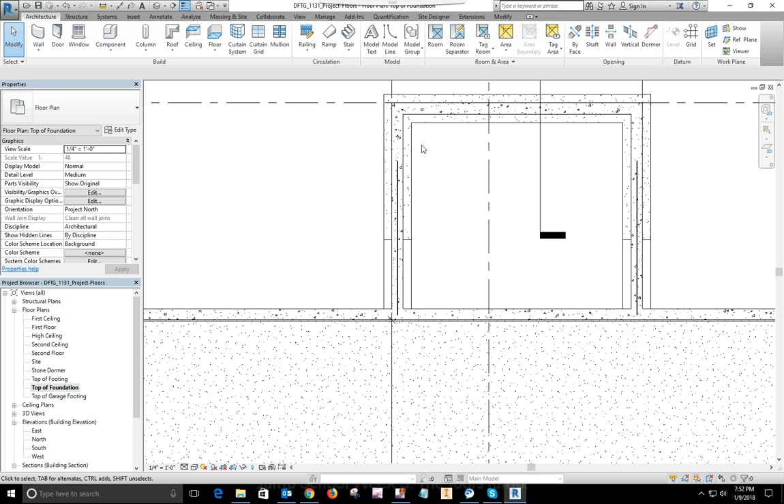Okay, now we're going to do the slabs over the terrace and the entryway, and probably have to do another video for the garage slab. I've already done in my project here the one back here of the terrace, and I'm doing these on the top of foundation level simply because everything for them is geared off of the foundation, the top of foundation.

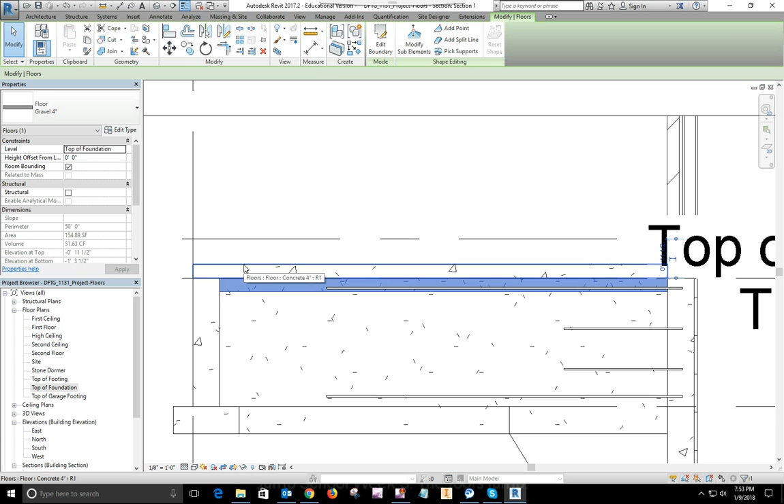So let me go to my section view here. I put in a gravel floor, just like we did with the basement, inside the perimeter of the walls, okay? And then my concrete floor slab, the 4-inch slab, sits on top of the exterior walls, and this is kind of in the way. But it ends right against the wall.

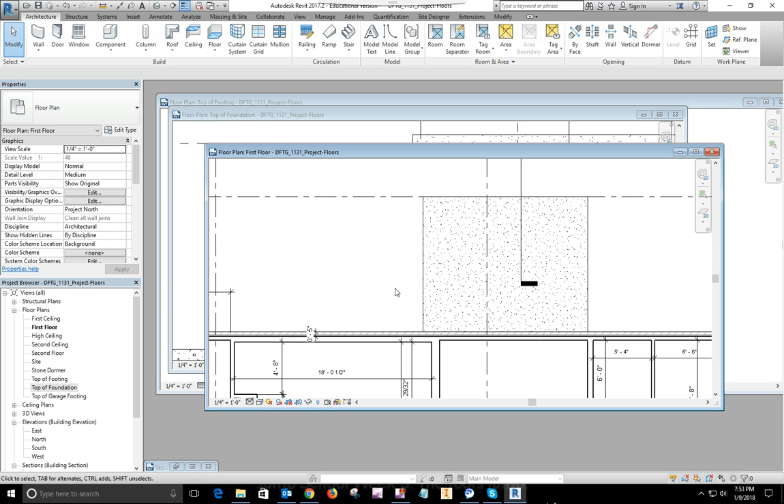So let me go back to the first floor plan, and you can see it there on my level one, my first floor plan level, and that's how it looks. And the plans that we're working from don't really tell us how to do this, because if you look at sheet number 2, the foundation plan, it just gives you a note: 4-inch poured concrete slab over gravel fill with number 4 bars. It doesn't give you anything. There's no section going through the building at either of those places to tell you that.

But if you look at the details for the grade beams, it shows the grade beam and the small foundation walls out in those areas. The top of those are level with the top of foundation wall for the basement. And then if you look at the front and rear elevation, the white mark below the stone is the concrete. So on the main house, that is the top of the foundation wall. And when you look at the entryway and the terrace at the rear, it looks to be about 4 inches higher in elevation than the foundation wall. So that's what I'm going by, okay? Since there's no other details for that.

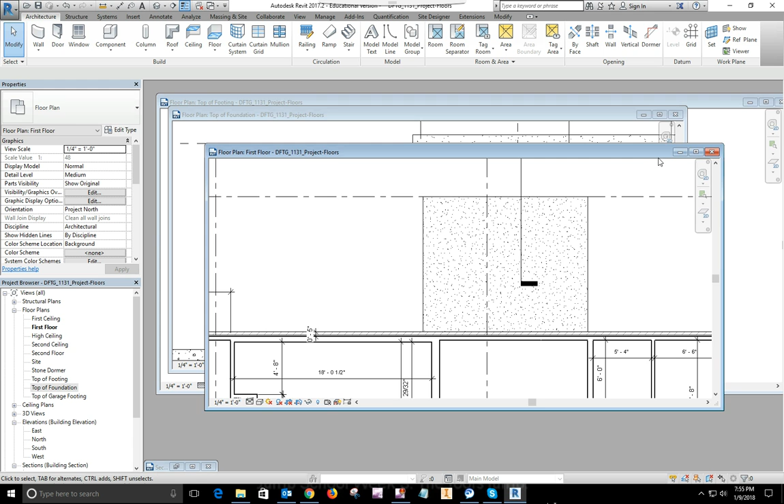And so here with this one, the gravel fill will just be inside of all of the areas. So that'll be an easy one to do here. And you can pick walls, you can pick lines, but we're going to go to the inside. Okay, and now we'll trim them back. Okay, and so that looks good there. An offset of 0, and that'll make the top of the gravel floor level with the top of foundation level. And no, we do not want to attach.

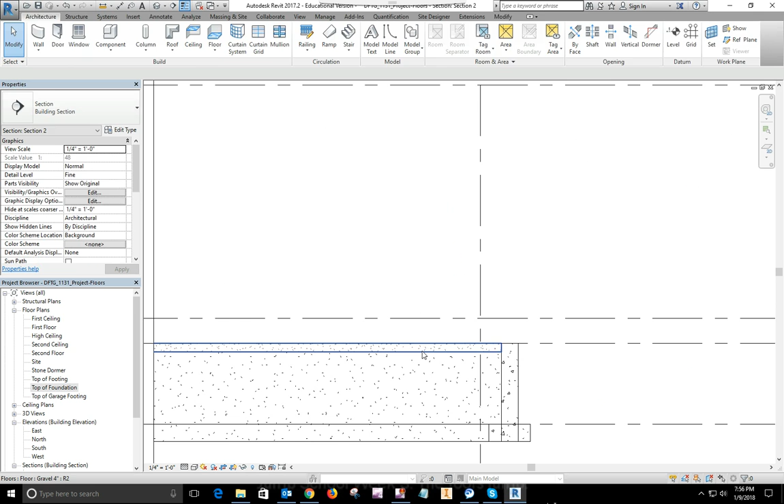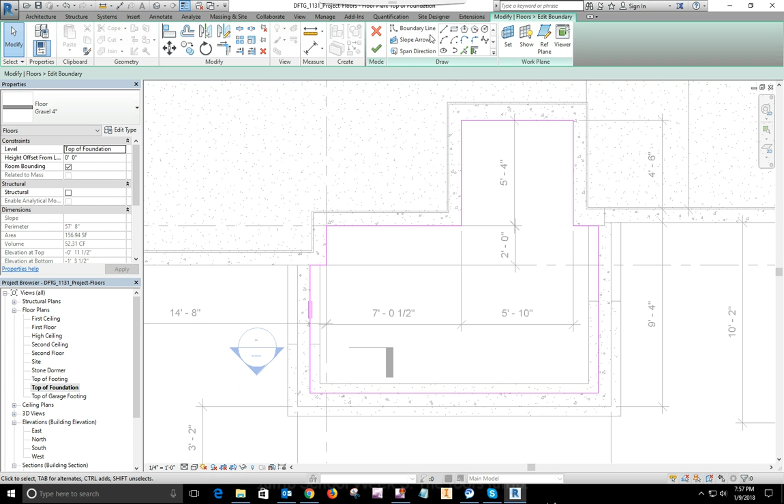That was kind of strange. I'm not sure where that came from, unless it was that corner there. So let's see, where'd my section marker go? Let me pull this back up and let's go look at that. Okay, that looks right. I don't see where it cut any volume out of any walls. Huh, that was strange.

Anyway, okay, and so now this one's a little confusing as far as the floor slab goes because it bears on top of these walls here. And so we can start with walls out here. And now we're going to have to draw lines in here and then dimension those.

And looking at the plans, it just tells us a 4-inch slab bearing in one of the notes. And then it's kind of hard to tell. So if it looks like the center of the wall, we'll go with a 4-inch bearing. On 2 of the walls there, it appears to be larger than half of the wall, so we'll go with 6-inch. And so now we'll have to put some dimensions in here. And here we're going to go with a 6-inch bearing.

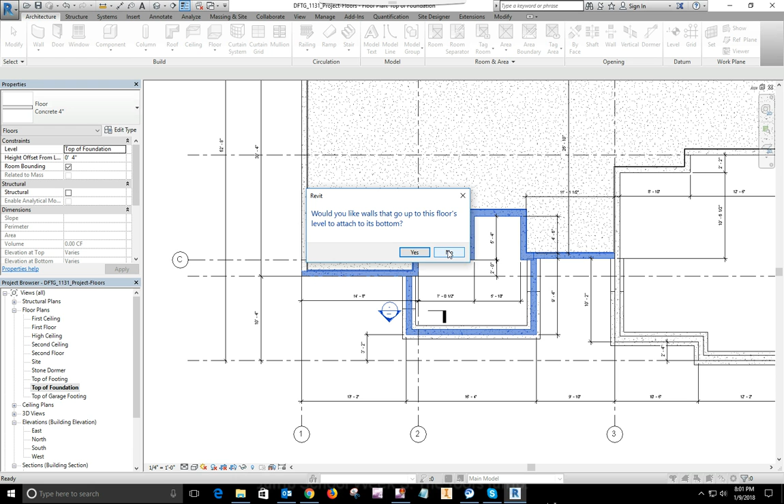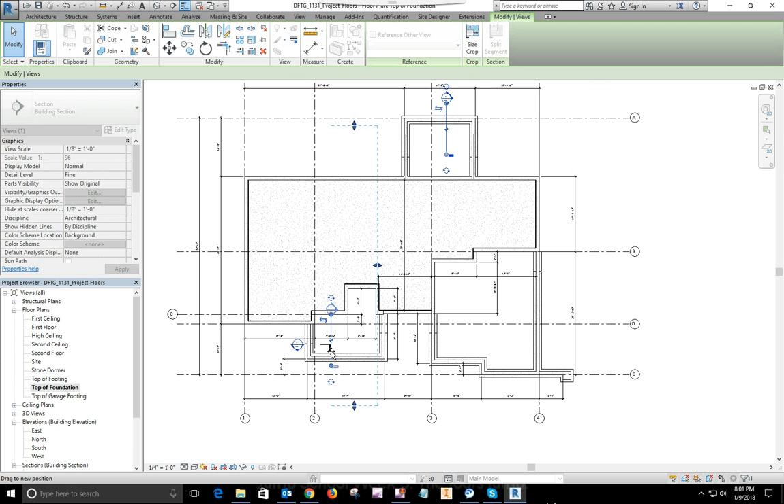And I know the book shows this a little different. It shows it coming down right there, but the slab has got to rest on top of something. Okay. And so let's finish that up. No, we're not going to attach the walls because the walls are going to level. And so there you see it goes over that wall. Hangs out over that wall. And now let's move this section view down so we can look at that.

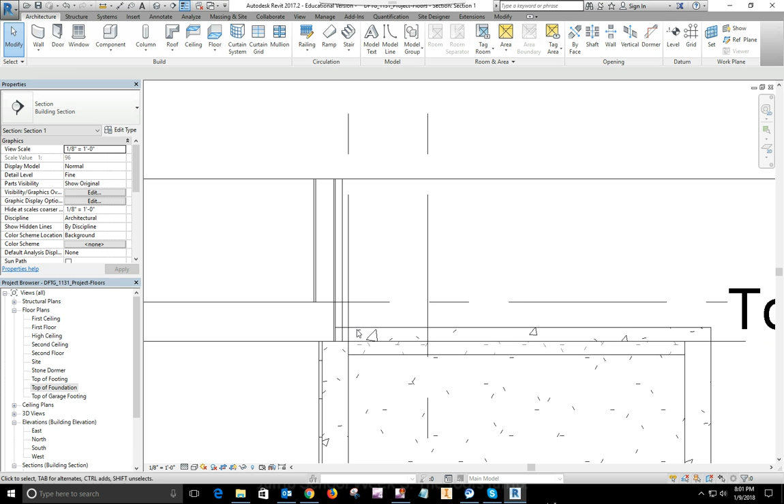Oh, I didn't mean to flip it. I want to go to it. Go to view. Sits on top of the outside wall and comes in just to the inside wall there. Okay, so that looks good. And we'll finish that up, and we're going to have to add the rebar to that. I'll have to look at that in another video. I don't have enough time left on this one. But they're not showing up on this because of our cutting level. But if we go to first floor, there